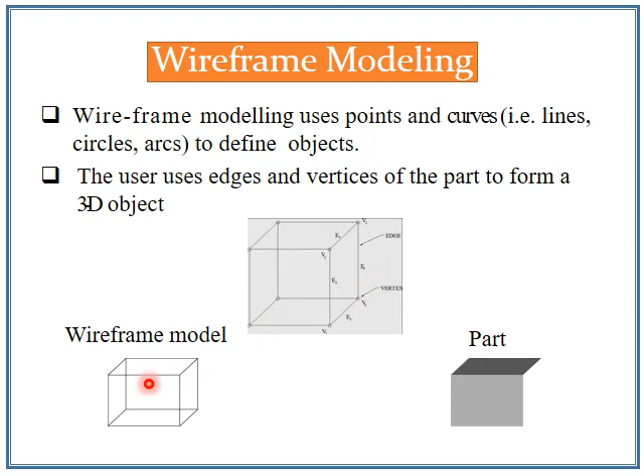These points are called vertices, which are nothing but endpoints. And what connects two endpoints is nothing but an edge, which means the two endpoints are connected to make an edge. E1, E2, E3, E4 are edges. So this is the wireframe model. Now the advantages of wireframe modeling.

With the help of wireframe modeling, we are able to convey information quickly and efficiently compared to multi-view drawings. Multi-view drawings are nothing but plan, elevation and so on. Wireframe models can be directly used in finite element analysis. With finite element analysis, we are able to analyze thermal properties, harmonic analysis and so on.

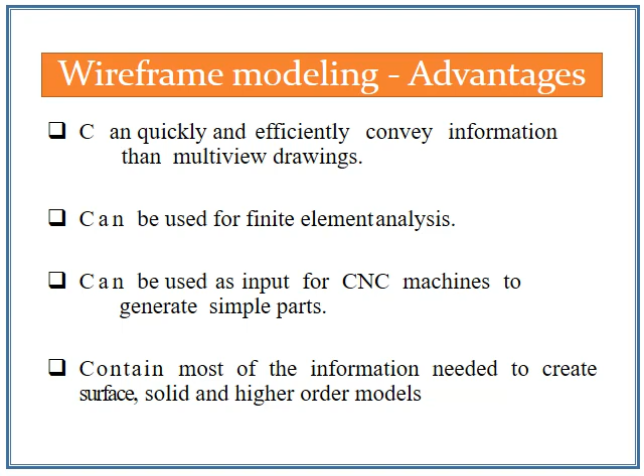It can also be used as an input for a CNC machine to generate simple parts. Simple parts, not complex parts, means these parts do not have any complex shapes or curves. And it contains most of the information needed to create surface, solid and higher order models. So this wireframe modeling gives the surface information, with the help of vertices and edges.

So what are the disadvantages of wireframe modeling? It does not tend to be realistic. It only shows the vertices and edges of an object. It does not show what the solid looks like, or how the core of the object will be. So it is not so realistic. It does not represent actual solids, that is, there is no surface and volume inside the solid object.

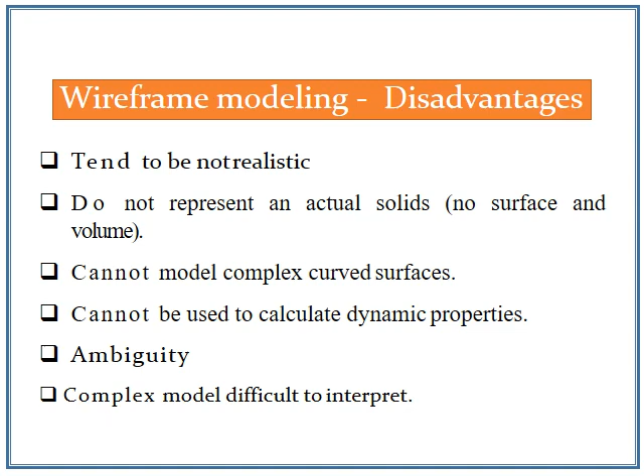Complex curved surfaces cannot be modeled through wireframe modeling, and so we are not able to calculate the dynamic properties of an object. Ambiguity means it cannot visualize the entire object in a clear manner. It only shows the outermost surfaces, edges and vertices of an object. A complex model is difficult to interpret with this wireframe model. That is the ambiguity property of this model.

Let us consider this as an example. Here it can be visualized in two ways: either a cubic solid object inside a glass container, or a complete solid object with a hollow cube inside, which is nothing but a core. The core is hollow. So it may be interpreted in these two ways.

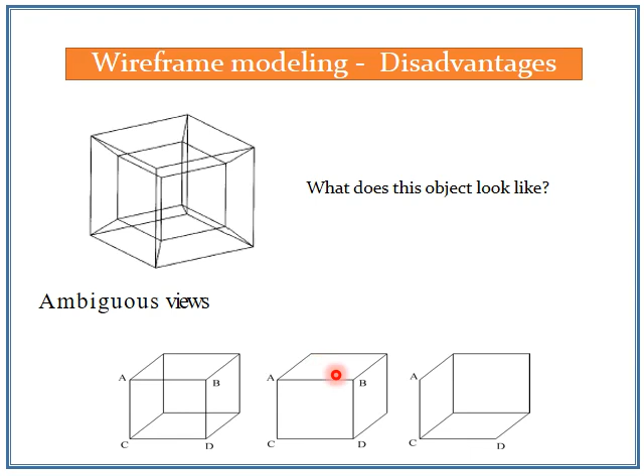Ambiguous views means the outermost views. A, B, C, D is nothing but face 1. This is one type of interpretation, and this one is another interpretation which does not show the interior or rear side vertices and edges, and this one is the third interpretation, viewed from another angle. So with this, wireframe modeling is over, and let us go into surface modeling.

A surface model represents the skin of an object. These skins have no thickness or material type. As the name defines, surface, it only represents the topmost layer of an object. So what is meant by surface modeling? It is more sophisticated than wireframe modeling, in that it defines not only the edges of a 3D object but also its surfaces. So by definition, surface modeling shows not only the edges of an object but also the skin of an object, which is nothing but the surface.

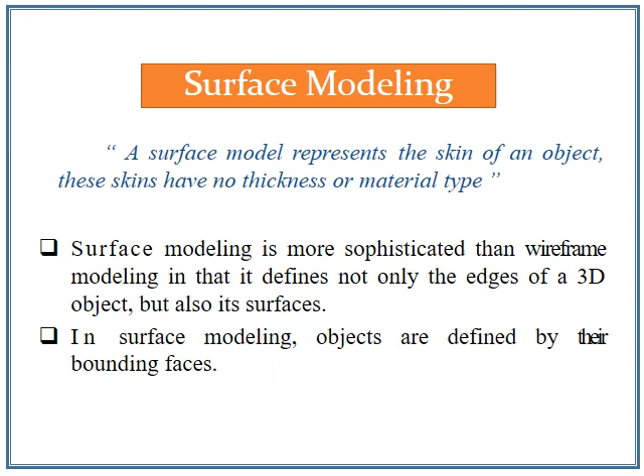In surface modeling, objects are defined by their bounding faces. Faces means a combination of 4 edges made to form a surface, which is nothing but bounding. So what are the advantages of surface modeling? Wireframe modeling provides ambiguous views and non-uniqueness, and these can be eliminated with surface modeling, which renders the model for better visualization and presentation; objects appear more realistic.

Surface modeling renders a more realistic object appearance than wireframe modeling, and it also provides surface geometry for CNC machines. In mold and die design, the most important thing is the surface geometry. Mold and die design requires the surface, how the surface looks. That geometry is provided by surface modeling, and it can also be used to design and analyze complex free-form surfaces. Complex free-form means the curves can be visually seen through surface modeling.

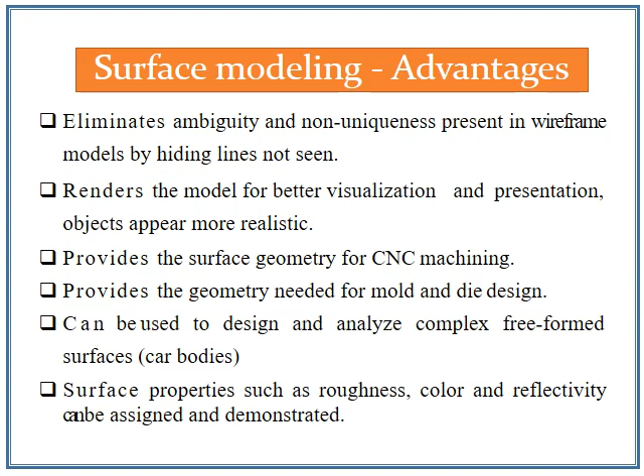And also the surface properties such as roughness, color and reflectivity can be assigned and demonstrated. So in this surface modeling, the roughness, color and reflectivity, etc., these are all surface parameters, and they can be assigned and demonstrated in the surface modeling.

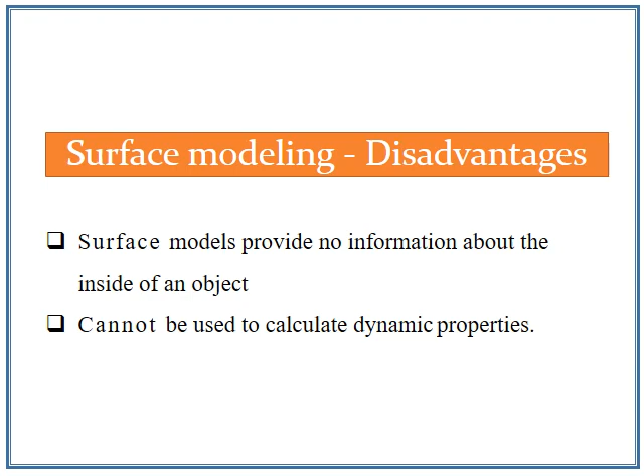So, disadvantages of surface modeling. Surface models do not provide any information about what is present inside an object. If a flaw is present in a solid object, it cannot be viewed through surface modeling, and it cannot be used to calculate dynamic properties.

Curves are used to represent the surface of an object. And how can the curves be represented? So we have to know about the types of curves. What are the types of curves? Explicit curves, implicit curves and parametric curves.

The third type of curve is parametric curves. In parametric curves, the function is converted into coordinates, or it can be stated that a point is mentioned as coordinates, and the coordinates of the points can be identified through the parameter t. Here we can see that x = x(t), y = y(t), and z = z(t). Here t is the parameter.

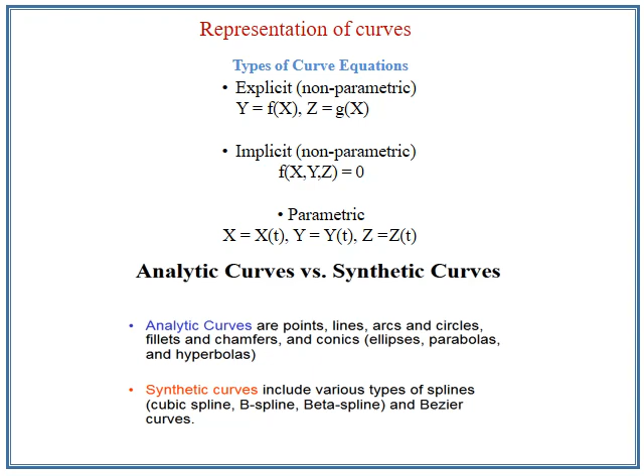Analytic curves versus synthetic curves. Analytic curves represent points, lines, arcs, circles, fillets and chamfers. So from this we can say that analytic curves are very simple or simplified. Synthetic curves include types of splines, such as cubic spline, B-spline, beta spline and Bezier curves.

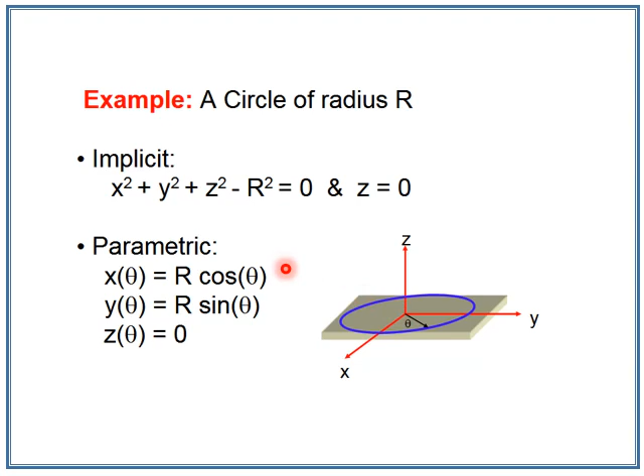A point on the circle represented with x and y coordinates and the radius is an implicit curve. In terms of parametric, theta is the parameter. If theta varies, the x and y component values also vary, which is a parametric curve. So with this one example we can define both implicit and parametric curves.

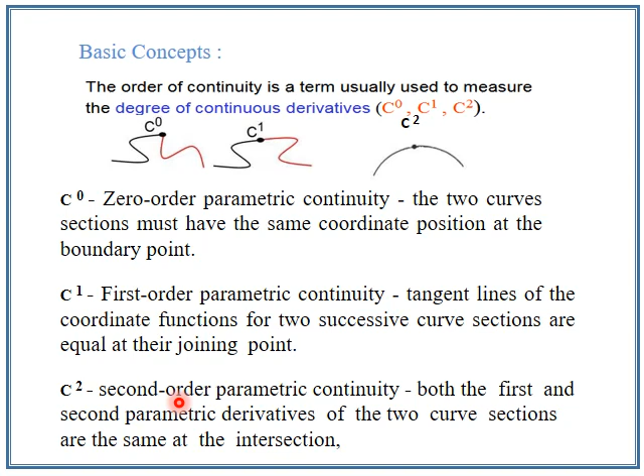Second order parametric continuity: both the first and second parametric derivatives of the two curve sections are the same at the intersection. We must keenly notice that first order and second order parametric derivatives are nothing but the first differentiation and the second differentiation. Both the first and second derivatives of the two curves, this one and this other curve, are the same at the intersection. Then it is noted as second order parametric continuity, and it can be visually seen in this example, C2.

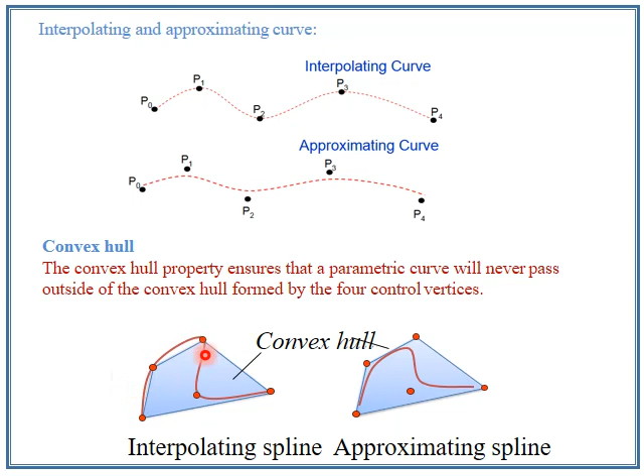Convex hull property ensures that a parametric curve will never pass outside the convex hull formed by the control vertices. Consider this as a curve, there will be four or more control points. So convex hull property means a parametric curve will never pass outside it. Approximating curves define the convex hull, so the curve never passes outside it. These four points are the control points of this curve. In this approximating spline, the curve does not pass through the control points, while in the interpolating spline, the curve passes through the control points.

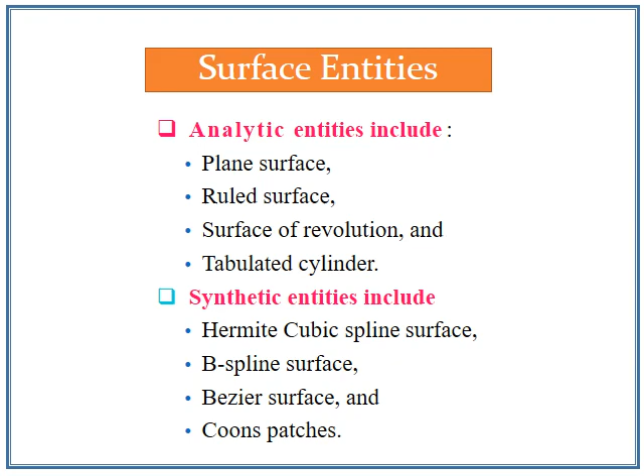Surface curves include surface entities, and these surface entities are classified into analytic entities and synthetic entities. Plane surface, ruled surface, surface of revolution, and tabulated cylinder come under analytic entities. Hermite cubic spline surfaces, B-spline surfaces, Bezier surfaces, and Coons patches come under synthetic curves, which include synthetic entity.

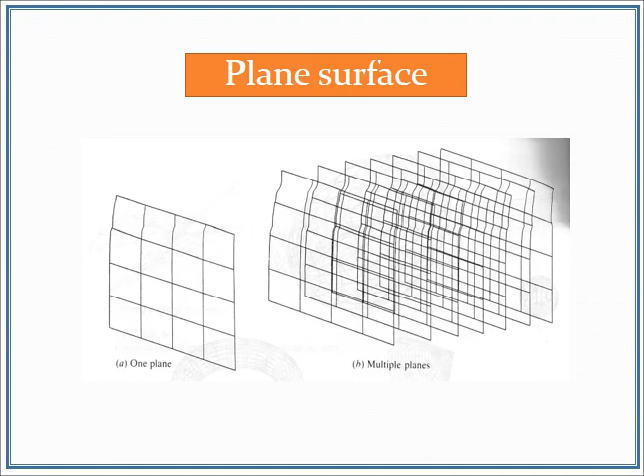Plane surface may be either a single plane or multiple planes. The word plane describes two-dimensional surfaces, either XY, YZ, or ZX.

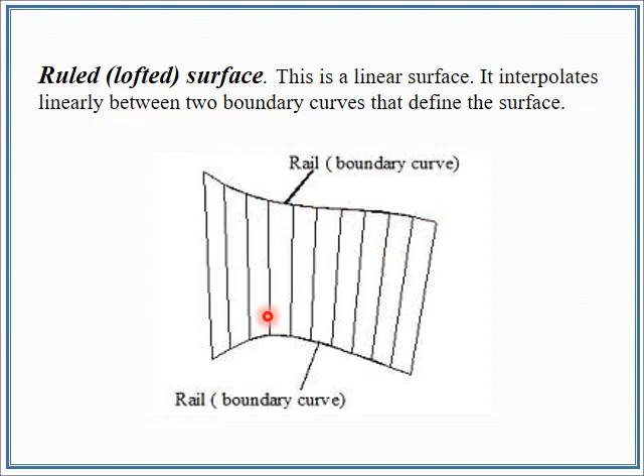Second, ruled or lofted surface. This is a linear surface. It interpolates linearly between two boundary curves that define the surface. This is curve number 1 and this is curve number 2, and this ruled loft surface interpolates linearly between the two boundaries -- a linear interpolation of these two curves.

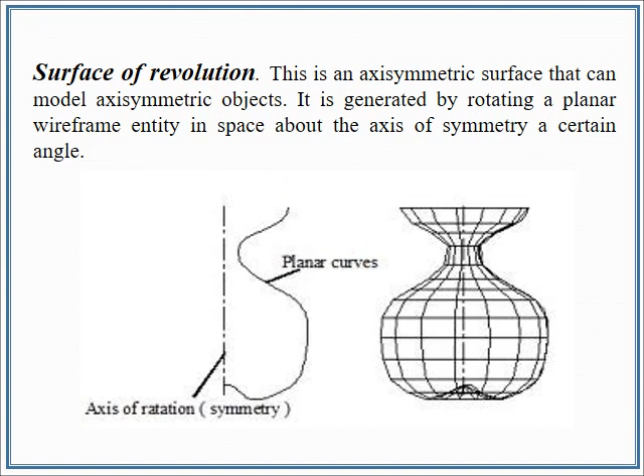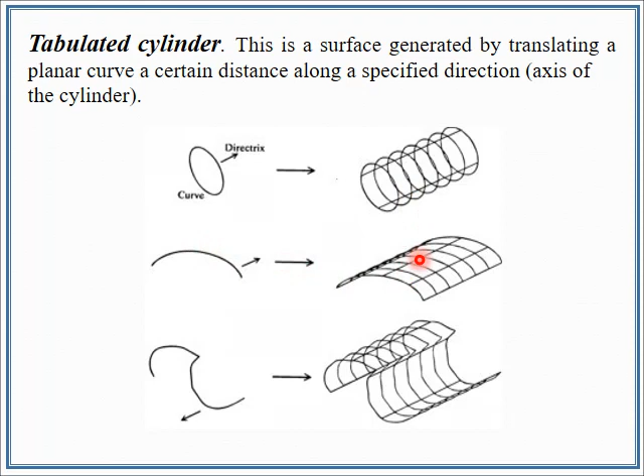The last of the analytic entities is the tabulated cylinder. This is a surface generated by translating a planar curve through a certain distance along a specified direction. Consider this as a circle in the two-dimensional plane -- this circle is converted to a cylinder by dragging the plane in either direction, as seen in this diagram. A curve need not be a circle only; it can be either this type or that type of curve. If you project these curves in either direction, you can obtain this type of surface entity.

And with this we can end this session, and in the next session we will see about the synthetic curves, which include Hermite curve, Bezier curve, B-spline curve, and Coons patches. With all these things, we can conclude the surface modeling. Then in this unit, we will have to see about solid modeling, which includes CSG and boundary representation. We can see all these things in the next consecutive presentations. Thank you.